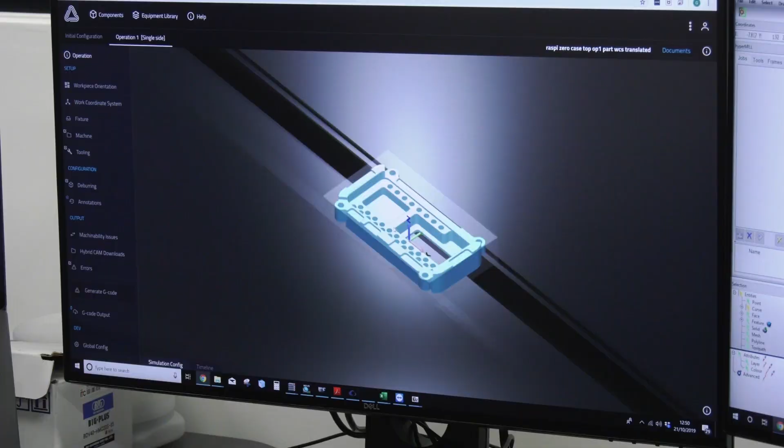Oh sure thing, Mark. So we are actually an artificial intelligence company, and our mission is to create full automation within manufacturing. Contrasted to today, which is a highly manual state of affairs, we see a future in which if I want to order a component, or 100, or say 10,000, I would be able to upload a 3D file to a web service, get instant design-for-manufacturability and pricing feedback, be able to buy that online, and then receive those components within days rather than weeks or months, for that receipt to happen 100% reliably on time, for the components to be perfect every time. I would expect to be able to just forget almost about the manufacturing of my components, because it's become as simple and as reliable as ordering off Amazon.

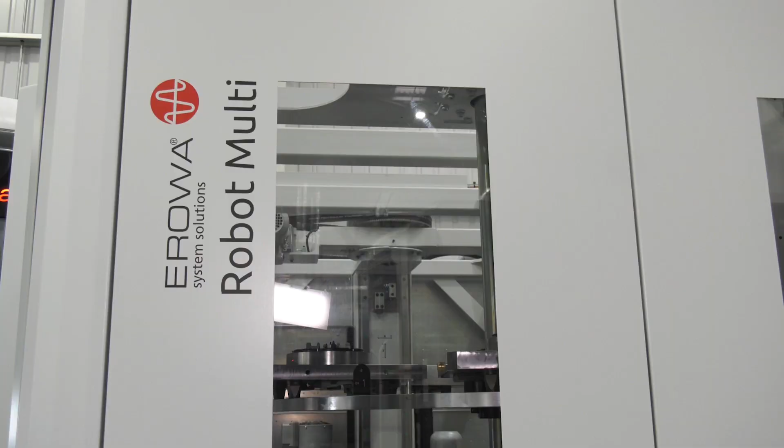I know that the price is right, I know that they'll arrive on time, and I know that they will be correct. That is the future we are trying to create here, and the key enablers for that are really technologies that fully automate CNC machines and the factories within which they operate.

Now it's quite interesting because you guys actually started out with your own CAM system, so what I'm seeing is that you're going to be applying more software to actually run this system to be a blueprint factory effectively.

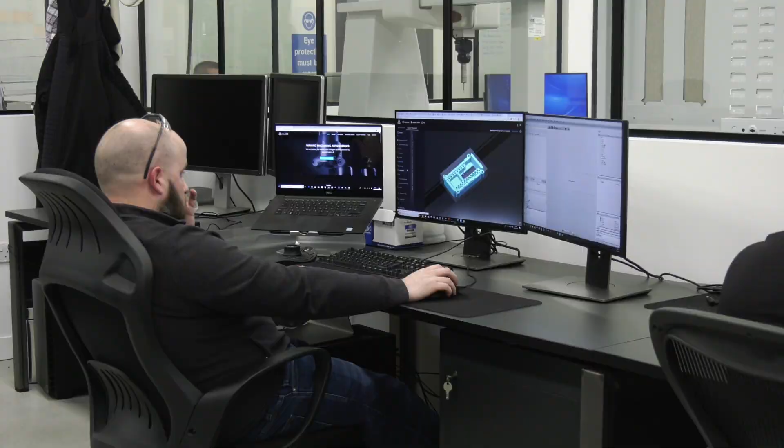Of course, so we are a tech company, and we like to tackle problems in a tech-first way. We've started out with software we've been developing for 4 years now that takes one of these CNC machines and a 3D file, and automatically searches through the trillions of ways of producing a component with one of these machines to find one of the fastest, contrasted to the traditional method, where I might have to sit in front of a computer for days to weeks, and it will still be very tricky to find an optimal solution, so people very rarely do.

But we're going beyond that now because we are building and scaling our own factories. We want to eventually get to a point of having tens of thousands of machines within our network, and that requires more than just automation of the machines, it requires automation of the overall running of one of these very complex factories. And that's what we're building, what we call a factory operating system, for.

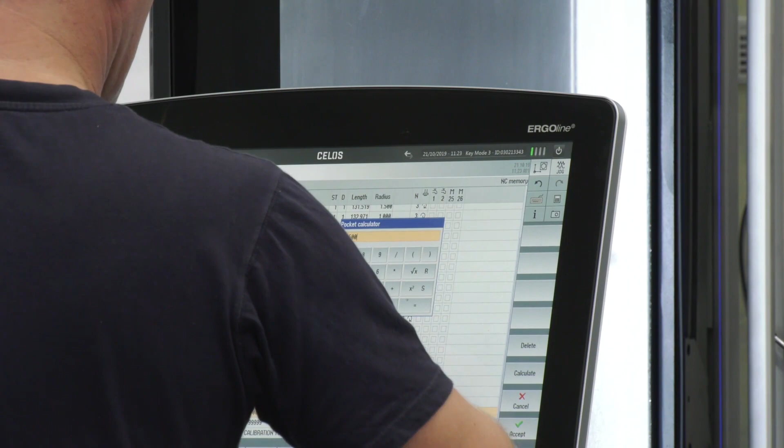It's an artificially intelligent system that understands the probabilities of all events within a factory and schedules and distributes tasks in such a way that we can get our utilization incredibly high without actually letting down our customers, because we require a very, very small amount of buffer for the few mistakes that fall outside of the capabilities and understanding of the system.

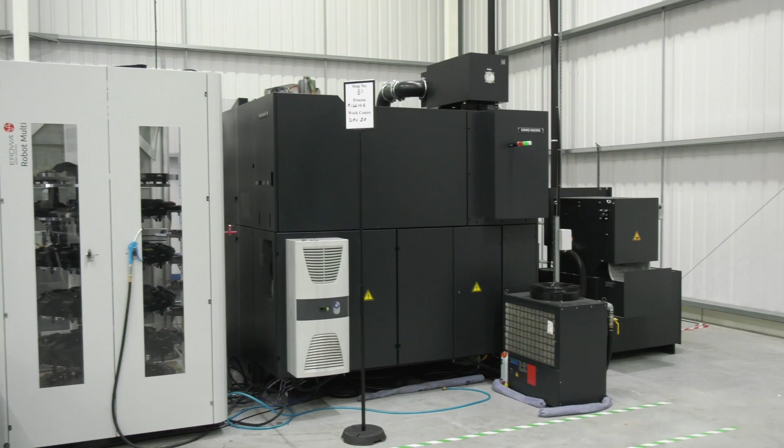Well, when you're talking about that side of it, it's very important to have a great partner. Now there are a lot of high-end machine tool manufacturers, but why DMG MORI?

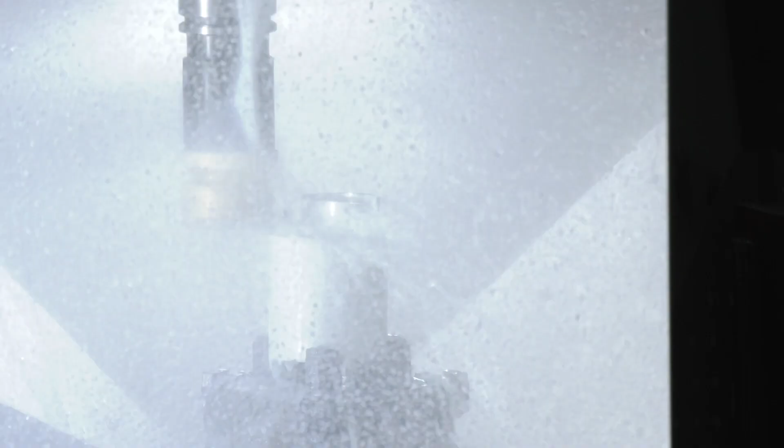So obviously DMG MORI, we love their machines. They are incredibly high performance. The 60 EVO platform you see behind me is the one that we are standardizing on for the moment for our workhorse 5-axis, and the linear drives and the incredibly high accuracy make it an ideal partner to our software, because our software is really able to exploit those very high speed capabilities to produce the parts incredibly fast.

And what enables us to produce components inexpensively is that we can run the machines faster than you would traditionally be able to with standard CAM software, because our system understands the science of metal cutting and can exploit that to its fullest extent.

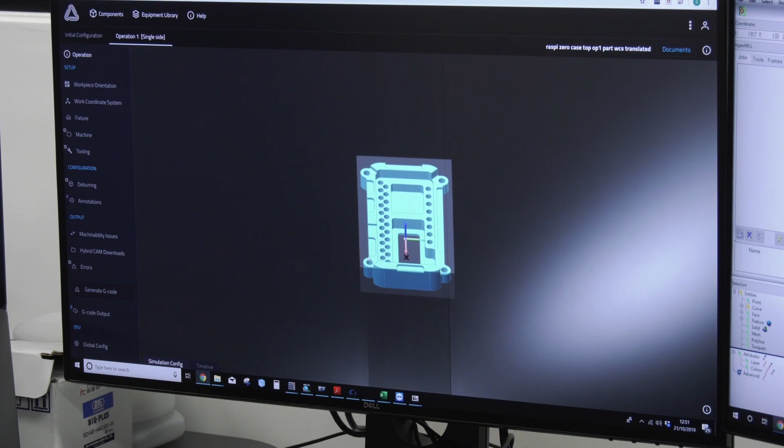But it's not just about the performance and reliability of the machines, it's also very attractive to us to be able to go to a provider that has its own financing solutions. So all we need to do is say, DMG MORI, we would like another 10 of these 60 Evos, can you sort this out for us? And then that entire life cycle from financing all the way to installation on the floor and after-service care is with one provider who are experts in it, and they can handle the whole lot for us.

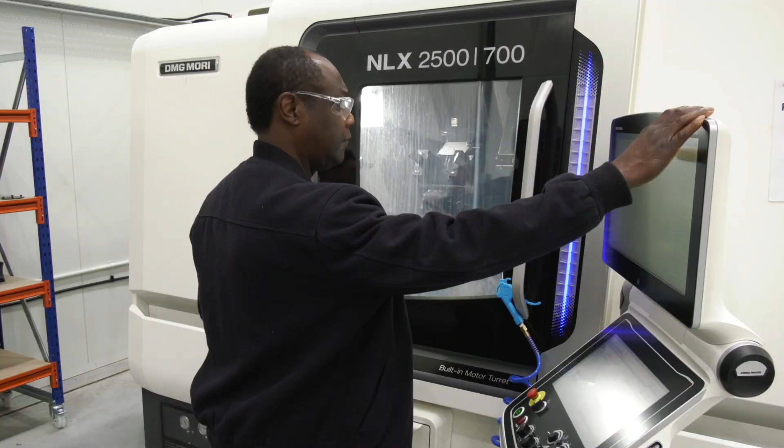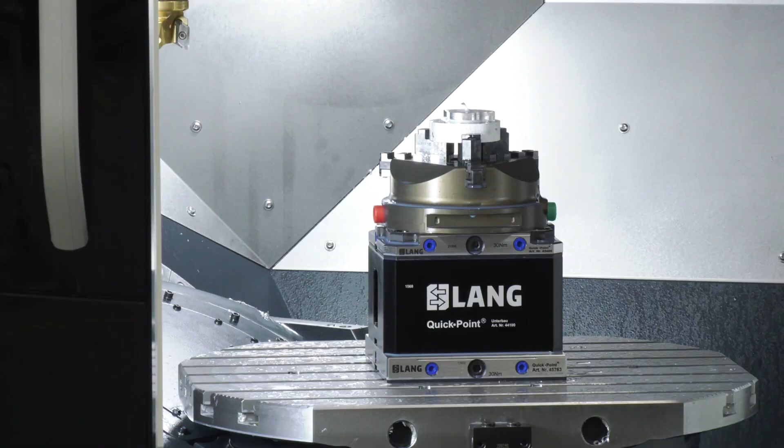I see also you've invested in the 95 monoblock and also a turning solution as well. So when you look at the industries, are you looking for high-tech components, precision prismatic parts? At this point, really we're looking to get into medium to large volume contract manufacture, exploiting our ability to produce parts faster, which means we can make them cheaper whilst delivering a very high quality standpoint.

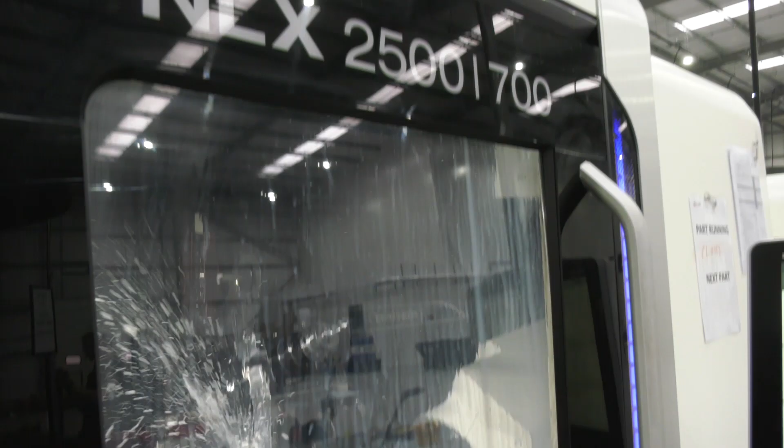Components within the 600 by 600 envelope is most of what is covered by the market. We've started investing in much larger machines because that seems to be an underserved segment within the subcontracting market, and turning because everybody needs turned components as well. Our focus is really on components in the 5 units plus range that could fit in one of these 60 EVOs. So from a job perspective, Theo, what is CloudNC's USP?

Our research has told us that there are 4 key pain points in the market, the most severe being on-time delivery. Customers do not necessarily expect that their components will turn up on time, because subcontracting as an industry, mostly through the lack of good software, makes it very challenging to tell somebody when a part is going to turn up and whether it's going to turn up on time or not.

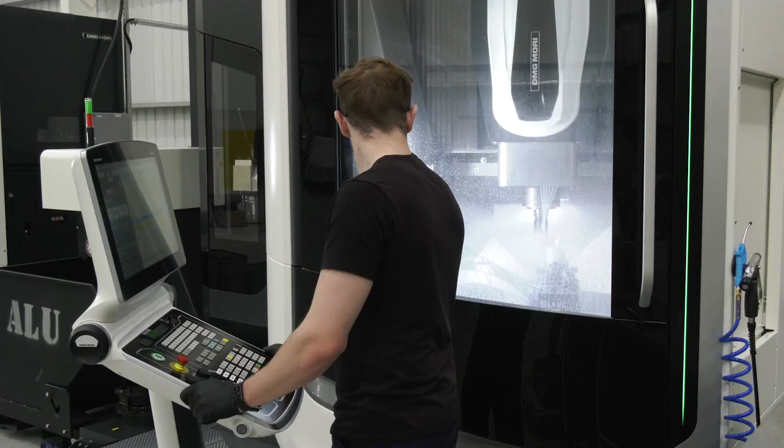The next is quality. We know that quality is an issue, again driven by the complexity of running these factories, paired with the incredibly high variability of manufacturing and subcontract. Next there comes price. Because these machines are not typically operated in an optimal fashion, prices are very much higher than they strictly speaking need to be.

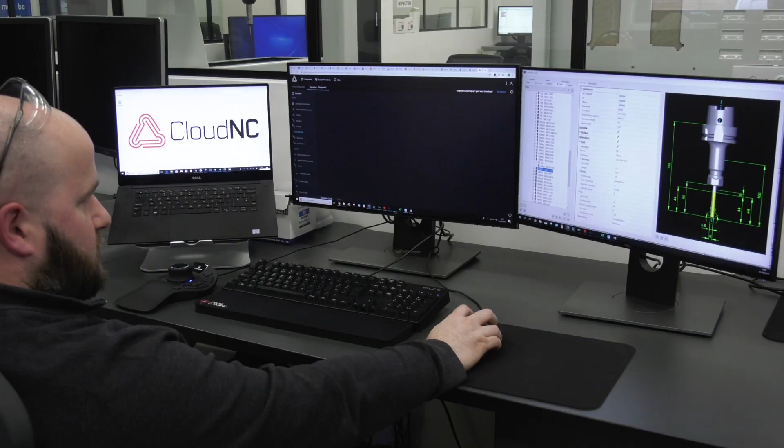And the last would be a general level of service. Again, coming back to software, we do not have, as an industry, the tools to interact with our customers in the way that, say, the tech industry might, and that's a change that we want to drive.

We're trying to drive change in all of those areas, starting first with quality. We were recently certified to AS 9100. Our quality system is very strong. We brought people in from the top of the industry to give us that baseline from which to compete. And so now we choose to compete on what we call breakthrough pricing. For any given level of quality, for any given lead time, we aim to be substantially less expensive than the competition in order to provide value for our customers.

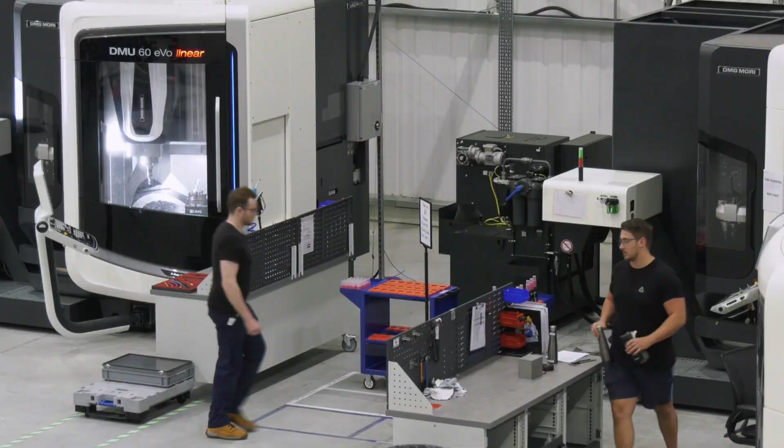That's very unique to what you offer to the marketplace. CloudNC is very, very different, and I think if I was a company looking to outsource components or maybe buy more machine tools, invest in more people, this is a great option to consider, isn't it? And a very high tech one. Now, is this the factory of the future, Theo? Is this how subcontracting solution providers will look in the next 10, 20, 50 years?

Well, naturally we have our views on this, and our mission is to try and bring about that future, but Mark, you've seen a lot more factories than I have over the years. I'd love to know what you think.

Well, I think from my perspective, we visit a lot of subcontracting companies, outsourcing, all the issues that go with that. It's normally people, investment, but I think you do have a blue chip. And one thing I want to say to the marketplace is that CloudNC is the future of subcontracting solutions worldwide.